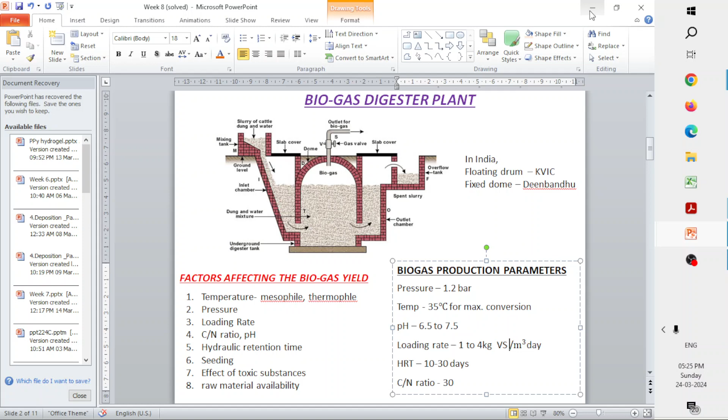The loading rate for your biogas digester system should be maintained between 1 to 4 kg of volatile solids per meter cube per day, as we discussed last week. Let me move to the week 8 slides. We kept the loading rate as 1 to 4 kg of volatile solids per meter cube per day - this is the optimal loading rate. Anything beyond this, or deviation from this scale, will be detrimental for us, and it will decrease the yield of biogas from the system, making the process unsuitable or uneconomical, and a waste of money.

So yeah, let's move on to calculation.

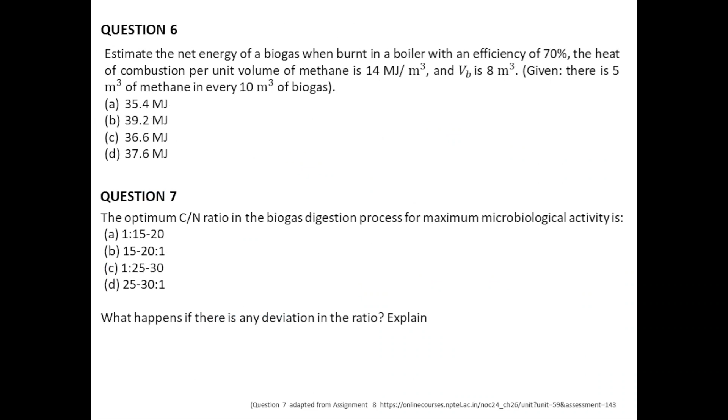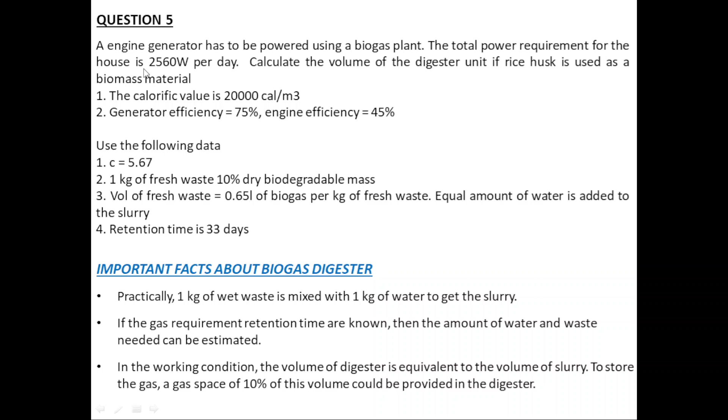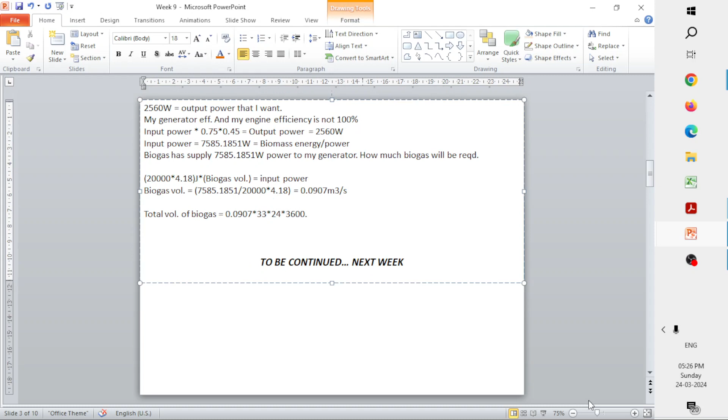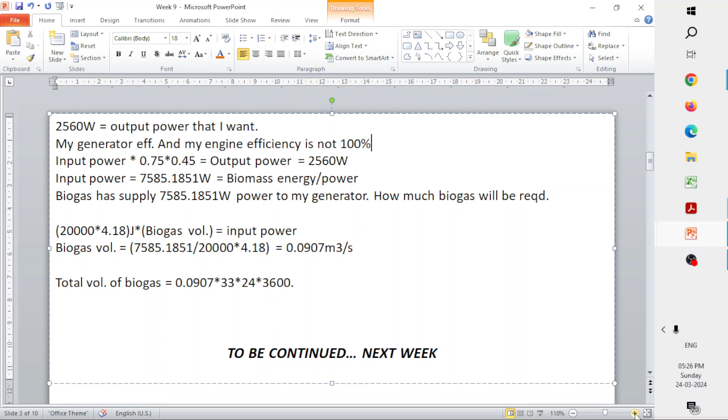In case your generator efficiency and engine efficiency were 100%, there would not have been any issue, because whatever power you supply from the biomass would be used to power my house. But here, unfortunately, the efficiency is not 100% - we have a cap. Generator efficiency is only 75%, and engine efficiency is only 45%. So whatever amount of energy you get from the biogas, if you feed it to the generator and engine, the same amount will not come out to our house, because some energy will be wasted or lost in the engine as well as the generator.

So output power, that is whatever the power that we require to power our requirement, is nothing but the input power that we get from biomass times the efficiency of the two systems, the generator efficiency and the efficiency of your engine.

So the equation is input power into 0.75 into 0.45 is equal to the output power, that is 2560 watts. So what is my input power? That will be 2560 divided by 0.75 times 0.45. So if you calculate, last time when we calculated, the input power was approximately 7585.1851 watts.

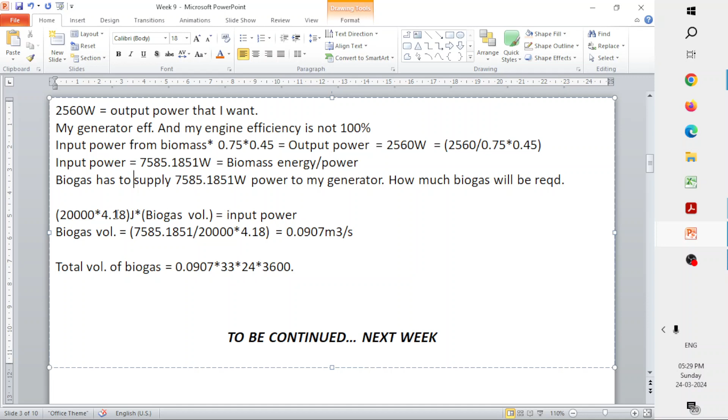So how much amount of the biogas will I require to generate this much amount of power? So that is our next question. We do not know what quantity of the biogas we require. That we are supposed to find out. We know our energy requirement should be 7585.1851 watts. So then we can write this as, we know what is the calorific value of our biomass, that is 20000 calorie per meter cube.

That times your biogas volume will give us the input power. So your biogas volume times your calorific value will give us the input power. So input power that we are supposed to supply is 7585.1851 watts, and we know the calorific value as 20 kilocal or 20,000 calorie per meter cube.

Since it's in calorie and it is in watts, the unit for watt is 1 watt is same as 1 joule per second. I hope everybody is able to recollect this units and dimension. 1 watt is 1 joule per second. So here, since it is in calorie, we are supposed to convert it into joules. So 1 calorie is equal to 4.18 joules. That is the reason this 4.18 factor has been multiplied.

So if you divide 7585.1851 divided by this 20,000 calories times 4.18, how much volume are you going to get? Last time we calculated as 0.0907 meter cube per second. So this is the biogas volume that is going to be generated per second.

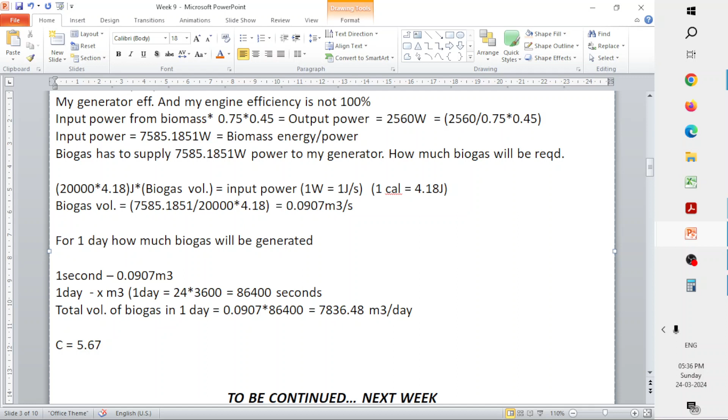So I am supposed to calculate that, because biogas is generated from biomass. Let's calculate, for this much amount of biogas to be generated, how much biomass I am supposed to feed into the system. For that we will use the value C. If you remember the C parameter, it is nothing but how much amount of biogas is generated for 1 kg of dry biomass waste I feed into my system. That is given as 5.67, meaning for every kg of biomass fed into the biogas digester, I get 5.67 meter cube of biogas.

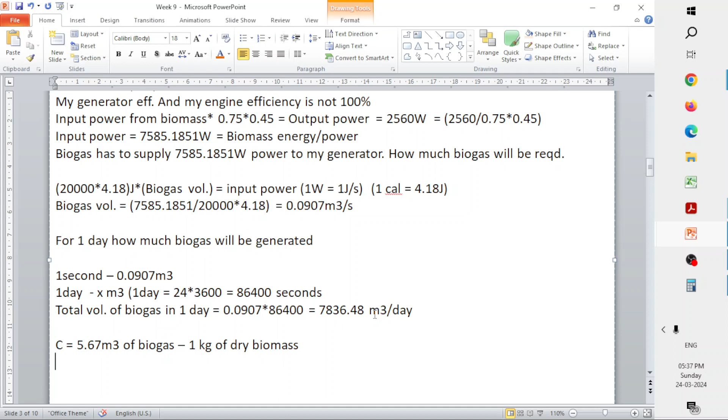So for 1 kg of dry biomass, I am able to get 5.67 meter cube of biogas. I have 7836.48 meter cube of biogas to be generated. So for this much amount of biogas, what will be the amount of biomass I am supposed to feed into the system? Can you calculate and let me know?

The calculation is very simple, you are just supposed to do the division here. So 7836.48 divided by 5.67, that will be 1382.0952 kg of dry matter waste required. So your value of x will be 1382.0952. This much kg of dry biomass waste should be supplied by me per day.

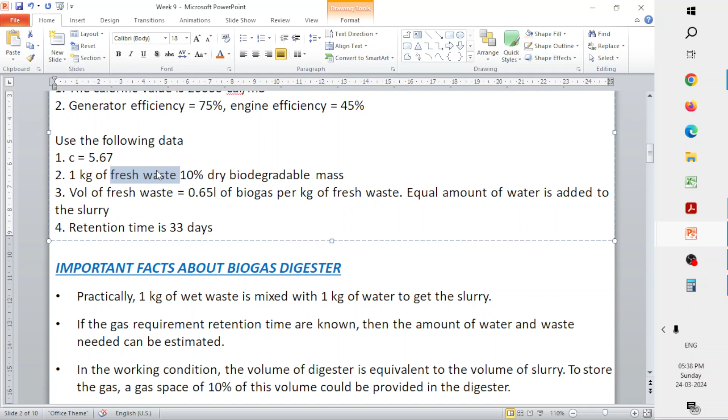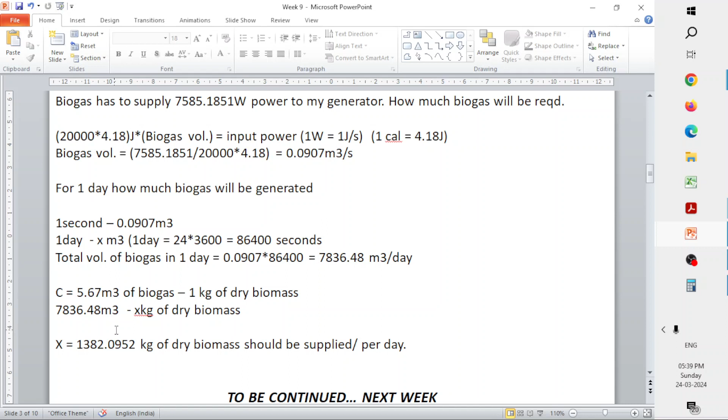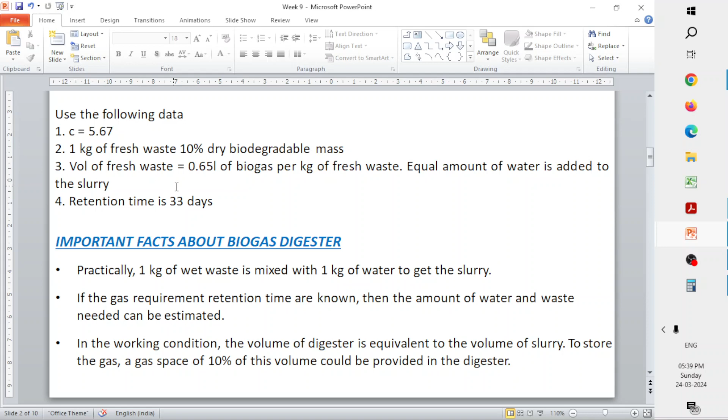So this is the amount of dry biomass waste that I have to supply. But unfortunately, whatever I have with me is fresh waste, not dry waste. So if this is the amount of dry biomass I am supposed to feed into my system, how much wet biomass waste should I supply? That ratio is given: for every kg of fresh waste generated, 10% of it is the dry biodegradable mass. So the amount of fresh waste will be this value divided by 0.1, because 10% of something is going to be 1382.0952.

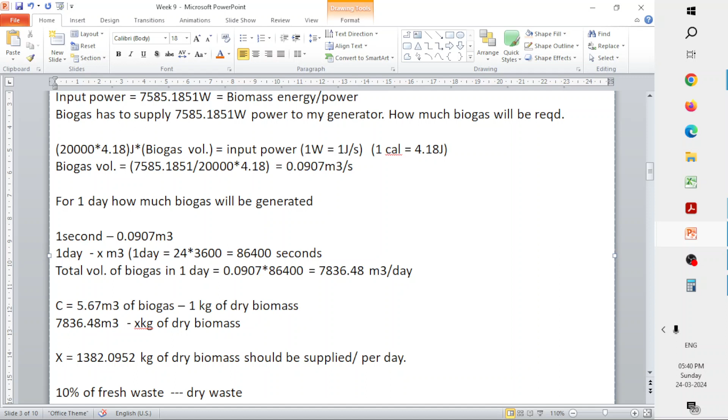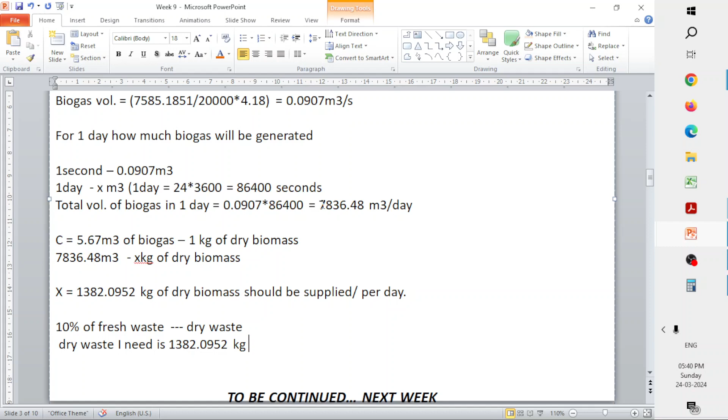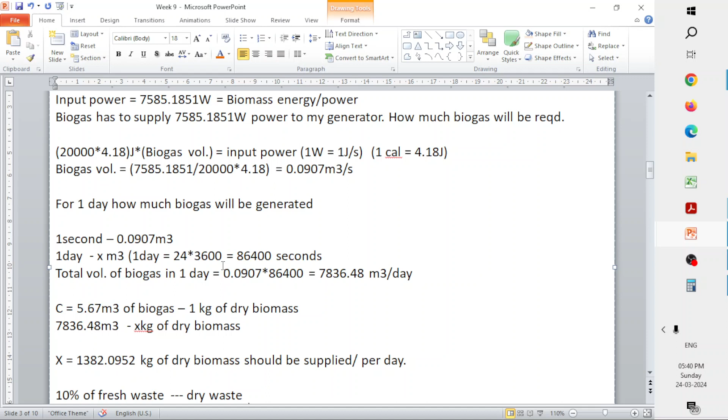10% of fresh waste is nothing but my dry waste. So I know my dry waste now: it is 1382.0952 kg of biomass, so that I will be able to generate a volume of 7836.48 meter cube of biogas, which will generate a power of approximately 7585.1851 watts. So this is the wet waste that I require. Let me write it mathematically also: 10 by 100 times x is 1382.0952, so my x value will be this whole divided by 0.1.

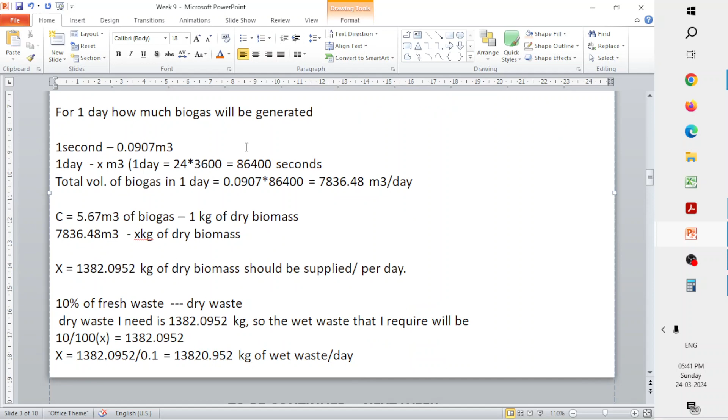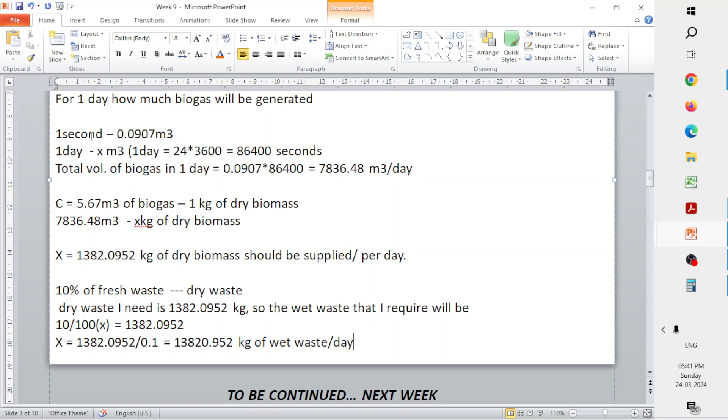That will be 13,820.952 kg of wet waste per day. So this much amount of wet waste is actually required per day for generating 1382.0952 kg of dry biomass, that will generate a biogas volume of 7836.48, to supply a power of 7585 watts, and that will be supplied to my generator to give me a power of 2560 watts. So this will be the amount of wet waste. But what are we supposed to calculate here? We are supposed to calculate the volume of the digester unit.

Now there is another term that is given. So for every kg of my fresh waste, for every 1 kg of my fresh waste, it is able to generate up to 0.65 liters of biogas. So this is for every kg of my fresh waste.

Now I have totally 13,820.952 kg of fresh waste with me. So how much biogas will get generated? Because this will be required for our calculation of the digester unit.

So if you, it's again just cross multiplying, it's just that 1 kg is giving this much, so this much amount of kg will give how much amount of biogas. So 13,820.952 times 0.65 liters. Let's calculate this also. This much amount of liter of biogas will be generated.

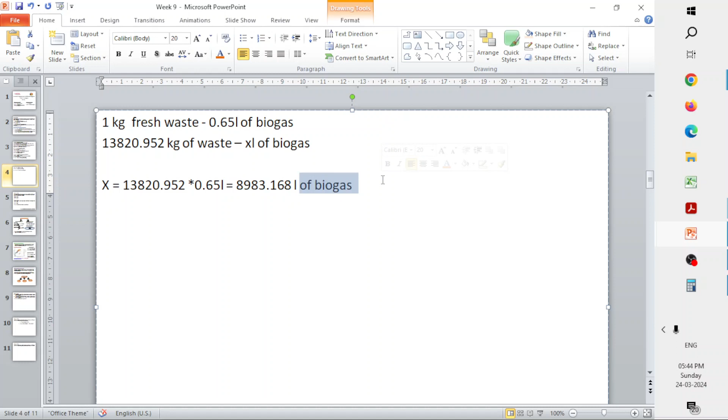Now as we said, we are supposed to add equal volume of water to this system, so that we are able to maintain the rate. If you see here, we are supposed to add equal amount of water to the slurry, so that will be...

Just a minute. I'll just calculate here in my personal. If you got the value, then do let me know.

So we are just supposed to multiply 8983 times 2, 17876 point, if I am not wrong, 336 liters.

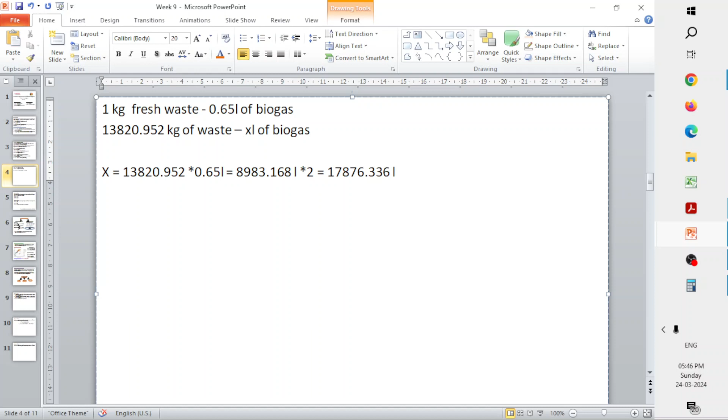Now this is everything we have done is for per day, but our retention time we know is for 33 days, right? So we are supposed to multiply this with 33.

So what will be the answer? So 17876.336 times 33. This much amount of liters will be there, we will get.

So let me just, oh, so these many liters, and then this you can convert as meter cube, like 1 meter cube is 1000 liters. So if you divide by 1000, you will get this much. This is your volume of the digester unit.

So we got to know how to calculate the volume of the digester unit. So first we take our power requirement. This is a kind of back calculation question, or you can also say we have done reverse engineering.

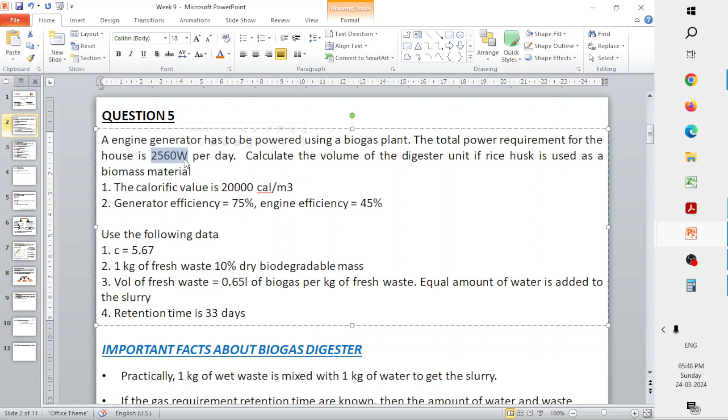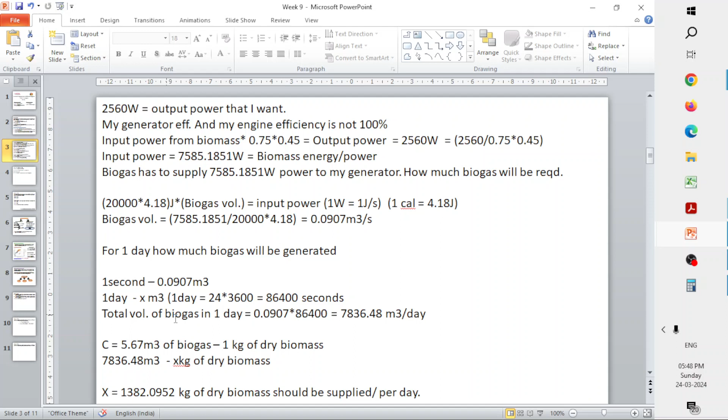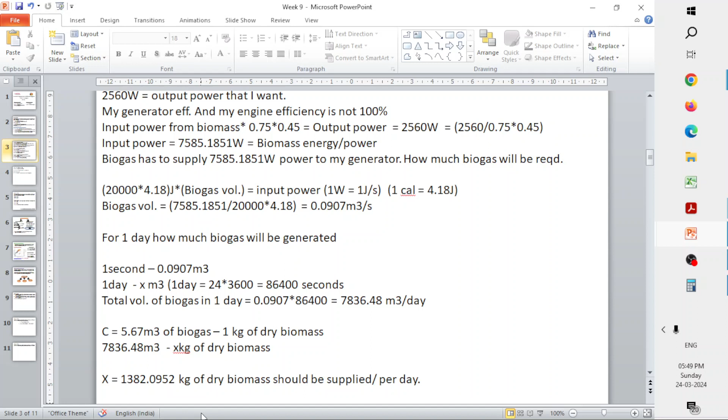From there you can calculate the volume of the biogas that is required to supply this much amount of power. If this much amount of volume of biogas is required, how much amount of biomass am I supposed to feed into my system, the dry biomass waste. If this is the amount of dry biomass waste that I am supposed to feed into my system, then what will be the fresh waste that I am supposed to feed into my system? This much will be the kg of wet waste per day.

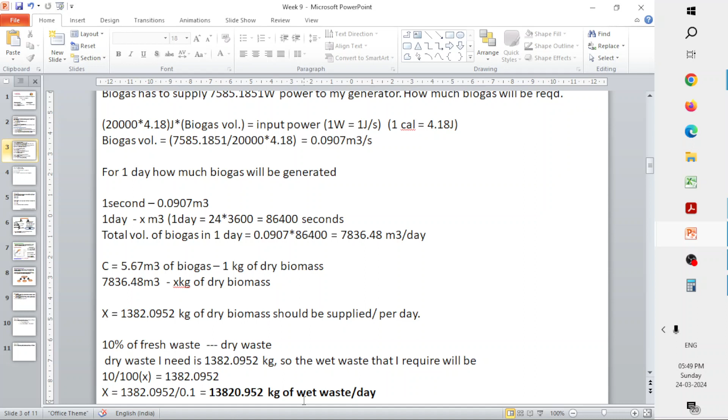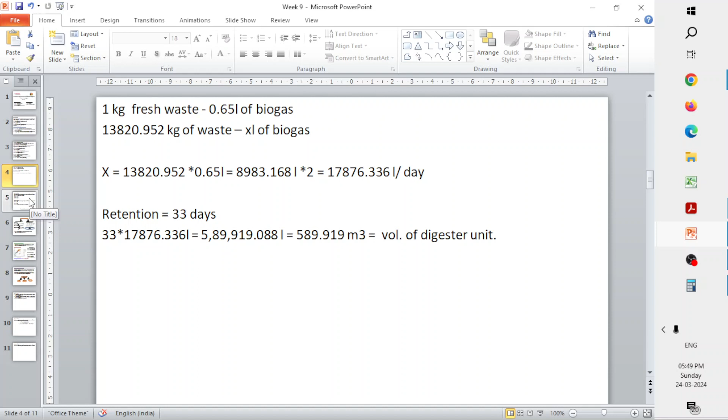And then after that, once you get to know this, then you will be able to calculate the volume of the digester. You just need to multiply that with the retention time. You will be able to calculate what is the volume of your digester unit. That is nothing but the amount of volume of biogas that will be produced by your system.

Now here we move on towards another two questions before we move forward for our discussion today. So I hope you will be able to solve the sixth question. It's a very simple question. You just need to estimate the net energy of a biogas which is burned in a boiler.

It has an efficiency of 70%. The heat of combustion is given as 14. Your volume of biogas is given as 8, and the given data is for every 10 meter cube of biogas, you have 5 meter cube of methane that gets generated. So you are supposed to calculate the net energy that will be generated by this biomass.

So this is very similar to what we did previously in the last live interaction session. So I hope you will be able to solve this. I'll just give you, let's say, 3 or 5 minutes, and then I expect you guys to answer this question. What will be the answer among the 4 options?

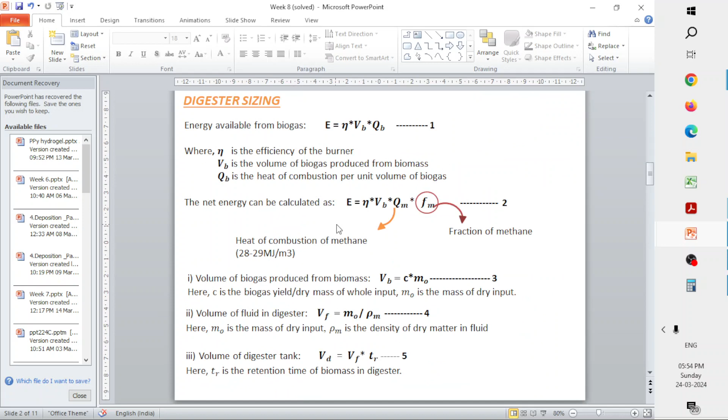This is a straightforward question, let me show the formula here. You will be using equation number 2. I hope you are able to see my slide, let me just zoom in. You'll be using equation number 2 here.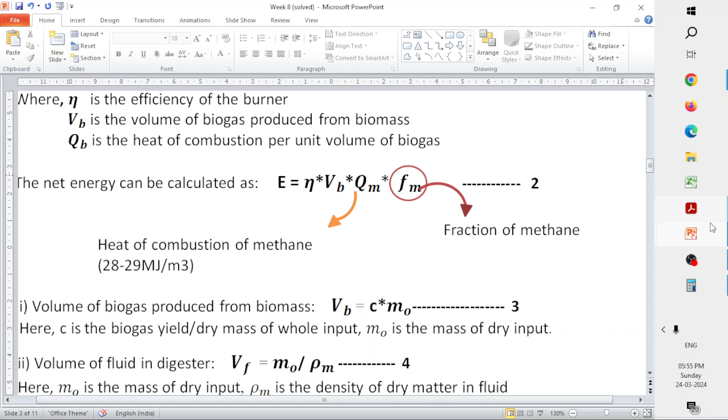Okay, can you tell me what is the value of eta, VB, QM, and FM? I'll type that here also. Net energy, or it should be net power, equals eta times VB times your heat of combustion Qm of methane times your Fm.

So eta is nothing but 70%, or 0.7. And we know our heat of combustion Qm value as 14 megajoules per meter cube. Volume of the biogas VB is also given as 8 meter cube.

Now suppose they are asking us, you are supposed to know what is the value of Fm. Once you know it, just multiply. So what is the value of Fm? What do you actually mean by Fm? This question is very similar to the one you would have solved for your assignment problems also. So what is Fm, what is the meaning of Fm? Then we will be able to calculate from this question.

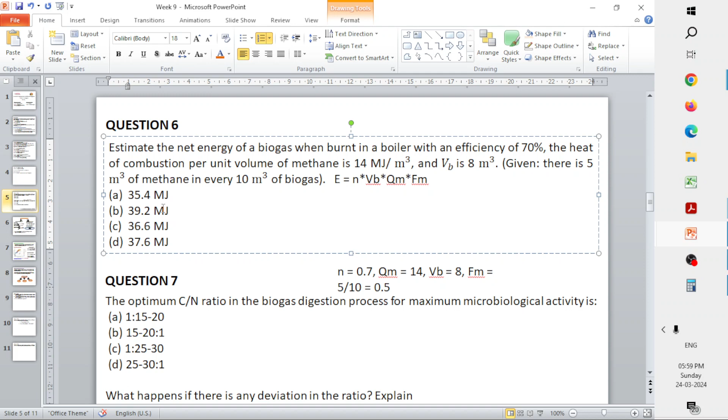So it's just now multiplication, please let me know the answer. You just need to multiply, and the units here are also the same, megajoules. So if you calculate, 0.7 will be your burner efficiency, QM will be 14, VB will be 8, and your FM will be 0.5. So 39.2 megajoules. This is the answer.

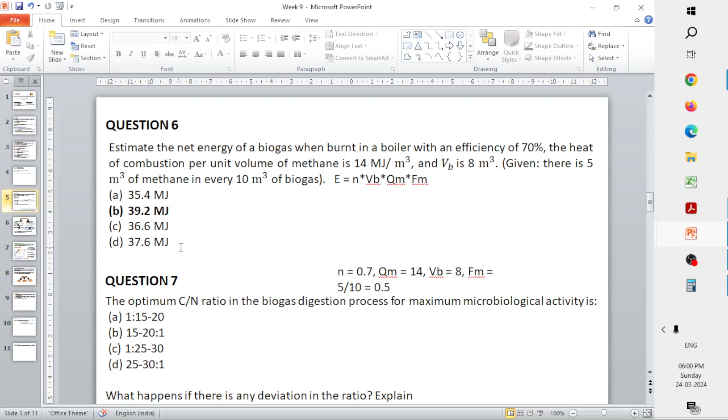This is a very similar question to what you would have solved for your week 8 assignment question. We solved this previously also in our week 8 live interaction session, if you remember. Compared to that one, this one was a very straightforward question. So next we move on to this, also one of your questions in the assignment.

What should be the optimum CN ratio for your biogas digestion process? If you remember, in last week's session as well as today in the introduction of the live interaction session, we discussed the different factors that affect your biogas yield from the biodigester system. One of the factors affecting biogas yield is your carbon to nitrogen ratio. So what should be its optimum value so that you can get maximum microbiological activity?

The question also we have put forth here is that if there is any deviation in this ratio - let's say I don't maintain it and maintain my own particular ratio - then what will be the implications or consequences of that? We are supposed to explain that as well. So what is the answer?

This is a straightforward question. Let me give you the answer first, because that is just the optimum ratio value you are supposed to know. But what we mainly want to know is why this is the optimum ratio and what happens if I deviate from this. So the optimum carbon to nitrogen ratio is 25 to 30 parts of carbon for every part of nitrogen. Now the question is, why am I supposed to maintain this, and what will happen if there is any deviation from this ratio?

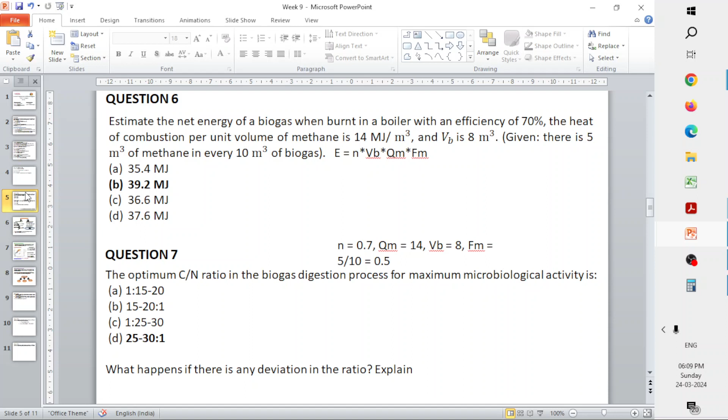In case you have any doubts, please let me know now, because we are going to move forward to our week 9 content, like the biomass conversion into different types of products. So if you have any doubt, let me know now.

In week 9 we will be again focusing on biomass conversion. Here we will be discussing every single process in detail of pyrolysis, gasification, combustion, and then we will be discussing about the ethanol fermentation.

We won't be discussing the anaerobic digestion process because we discussed this concept rigorously in depth in the last week session and the week before that. Here we will be discussing only the thermal conversion processes: pyrolysis, gasification, combustion, and one more process called torrefaction. In chemical conversion, we will be moving to ethanol fermentation.

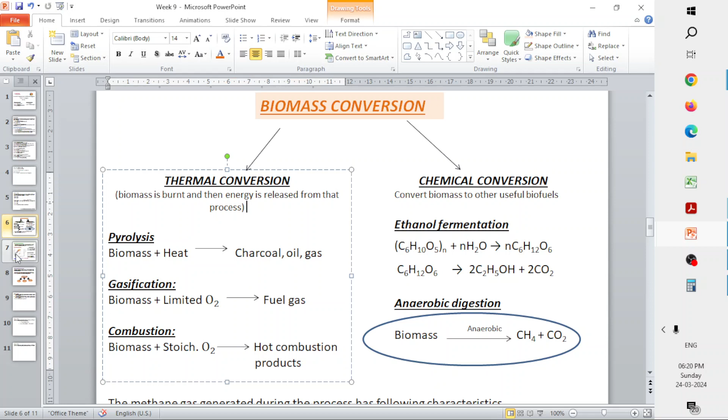Pyrolysis: no air or oxygen. Gasification: limited supply of oxygen or air. Combustion: stoichiometric or excess quantity of air or oxygen. So now we move to combustion. Let me just put this in PowerPoint mode—combustion of biomass.

So what is the meaning of combustion?

As we said previously, we will be using stoichiometric quantity or excess quantity of air for the complete combustion of the biomass. I hope my slide is visible to everybody, because usually when I do this, the slide may not be visible to you guys.

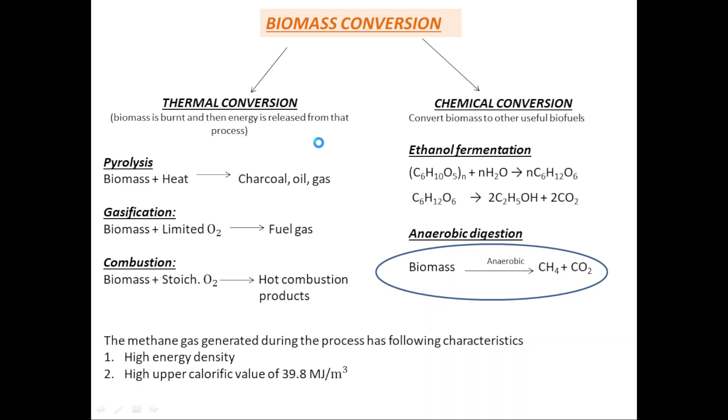So what is actually the meaning of combustion of the biomass? As we said, it is either burning of your biomass sample in stoichiometric quantity or excess quantity of air. So what is the meaning? If you see this word, the stoichiometric quantity of air, what do they mean when they say a stoichiometric quantity of air?

For a combustion or burning process, there are totally three things actually required. If you are going to burn a material, combust a material, you are going to require three things. One is your air, because without oxygen supply you cannot ignite the material, you cannot burn it. Then you require fuel, and the third one is temperature. Without these three things, any material will not burn. So enough supply of oxygen, enough supply of fuel, and enough temperature should be there for burning a particular material.

So the stoichiometric quantity of air, the alternate term for it, is theoretical quantity of air. The exact meaning of the stoichiometric quantity of air is nothing but the theoretical amount of oxygen that is required to complete the combustion process.

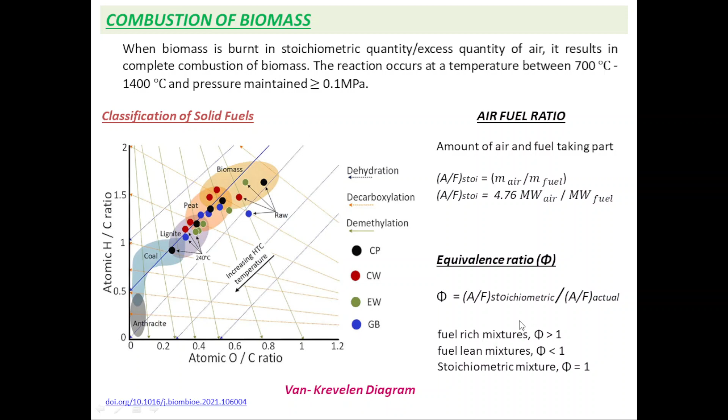Because this equivalence ratio can actually be written as F by A of actual divided by F by A of stoichiometric. This can alternatively be written by inverting the A and F, the amount of air and the amount of fuel. If you write it the other way around, this will be the equivalence ratio formula.

So from this you can say that if phi is greater than 1, then F by A will be greater than 1, which means the amount of fuel you put into your system will be greater than the amount of air present. In case of fuel lean mixtures - the word 'lean' means it is less in amount - so in that case the amount of fuel present compared to air will be less.

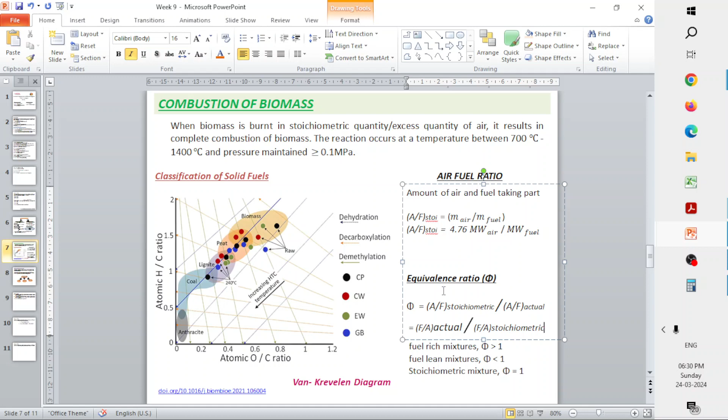Now we move on to the process called torrefaction of biomass. But before this we have to discuss the classification of solid fuels. This is also called the Van Krevelen diagram. It is a plot between your hydrogen to carbon ratio to that of your oxygen to carbon ratio.

It usually represents the elemental composition changes that happen when it undergoes dehydration, decarboxylation and demethylation process. The fuels that have high oxygen to carbon ratio, when you go beyond 0.8 on the right hand side of the axis, the heating value - I hope you recollect what is meant by heating value - that value will decrease.

One more thing to make sure here is, the higher the oxygen and hydrogen content - since hydrogen and oxygen can react and form water - the high volatile liquid yield will be more. So when you select a particular material for combustion or gasification, the oxygen to carbon ratio should be low so the heating value will be more, and the hydrogen and oxygen ratio should also be less, so that volatile liquids cannot be formed.

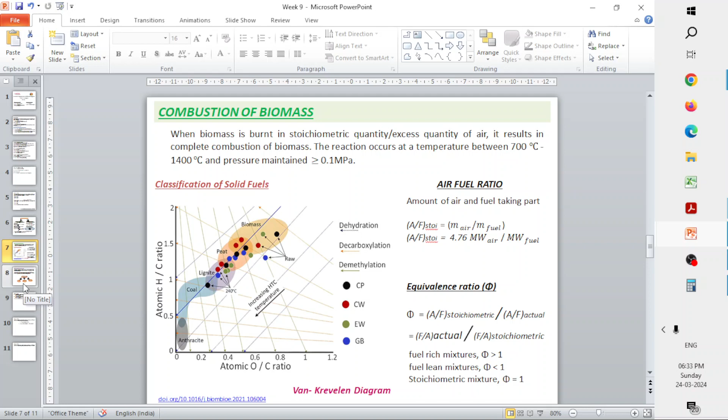So these two things you should keep in mind while selecting your biomass for a particular process. Next we move on to the torrefaction of biomass. If you have doubts related to the combustion process, you're welcome to ask me before we move forward to this thermal conversion process called torrefaction of biomass.

This process is again a thermal conversion process, just like pyrolysis, gasification and combustion, and it also occurs in an inert or low oxygen environment, similar to pyrolysis and gasification. But it's different from carbonization and pyrolysis even though their processing conditions are similar. The amount of carbon rich solid product you get through torrefaction will be higher compared to carbonization and pyrolysis, and other advantages and disadvantages are listed in the video lectures.

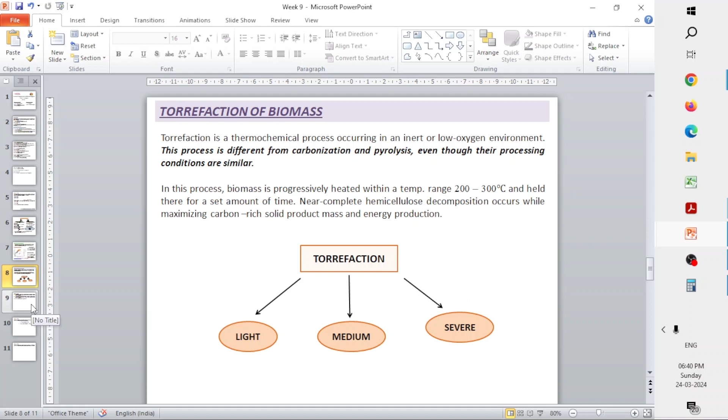So in case of a severe torrefaction process, entire degradation happens. In medium torrefaction, the hemicellulose and cellulose degradation happens. In light torrefaction, only hemicellulose degradation happens. So this is the different types of torrefaction process that we have.

Now let's start solving some problems related to the combustion process, and how much amount of ethanol you will get from the ethanol fermentation process.

So here you have a question. It states that the theoretical ethanol yield that you have from a C6 sugar, so 6 carbons are present in that sugar form, is 700 kg per ton. They are asking you to calculate the approximate concentration of sugar present in the biomass if the theoretical ethanol yield constant is 0.51. So this is a very simple question. I hope you will be able to answer this question.

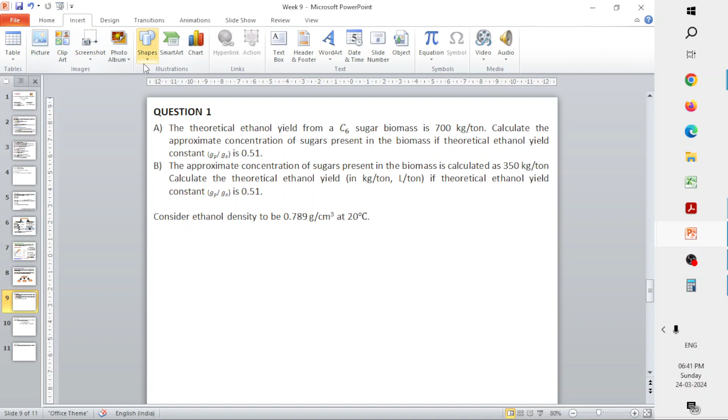Let's just solve this question. So your theoretical ethanol yield, what is it? It is nothing but your concentration of sugar in that biomass times your yield constant.

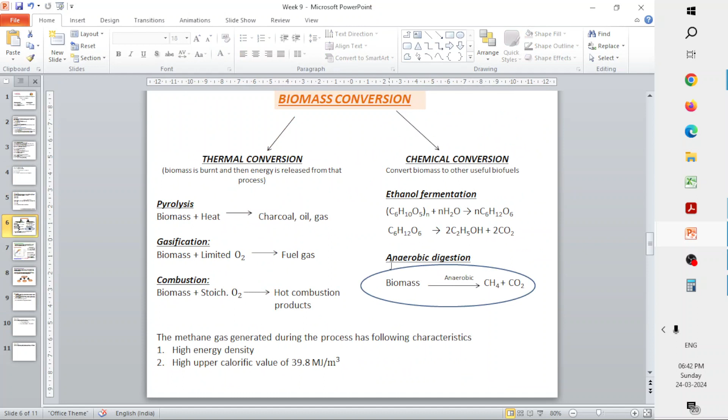So your entire sugar will not be able to get converted to ethanol, right? There will be a certain fraction. If you see in case of this chemical conversion also, some amount of the sugar, that is your glucose sugar, will get converted to carbon dioxide. So it's not that all the sugar present in your biomass will be converted to ethanol. There will be a certain percentage of that sugar content which will be released out as carbon dioxide gas. That is the reason we are supposed to calculate the theoretical ethanol yield.

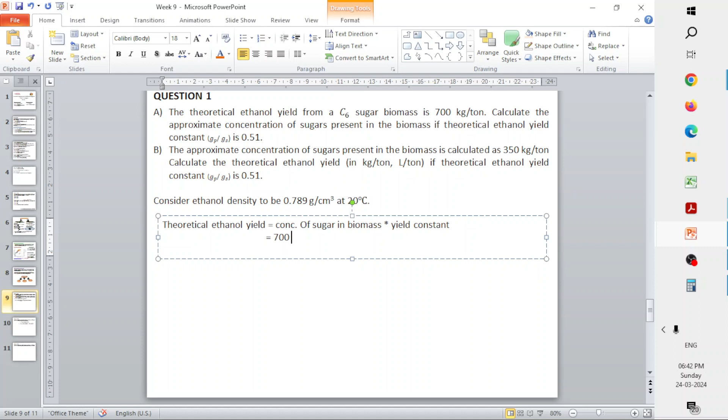So this is very simple here. You have the concentration of sugar in the biomass, that will be 700 kg per ton, and your yield constant value is given, that is 0.51. So that's all simple. Your theoretical ethanol yield will be nothing but 700 times 0.51, it will be approximately 357.

And since the yield constant is dimensionless, the result is in kg per ton. So what it actually means is, for every 1 ton of biomass, you have 700 kg of sugar, and when you process that sugar, you get 357 kg of ethanol. Ton is nothing but 1000 kgs. So for every 1000 kg of biomass that you subject to the fermentation process, the sugar present in the biomass will be 700 kgs, and for every 700 kg of your sugar that undergoes the fermentation process, you will be able to obtain 357 kg of ethanol.

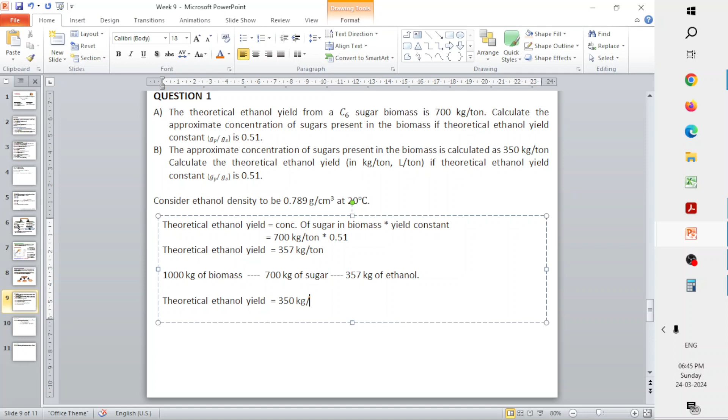So the theoretical ethanol yield: concentration of your sugar in biomass is 350 kg per ton, and your yield constant value is 0.51. This will be approximately, it's just half of that, so 178.5 kg per ton of theoretical ethanol yield. So this is the theoretical ethanol yield you will get, 178.5 kg of ethanol for 1 ton of biomass. Now you are supposed to calculate it in liter per ton.

So that is nothing but, if you divide this by density, you will be able to get the theoretical ethanol yield in liter per ton units.

So that is nothing but 178.5 kg per...

Your density is given as 0.789 gram per centimeter cube. So here it is in kgs and here it is in grams, so you are supposed to convert this into kg per liter, right? So 1 centimeter cube is nothing but, I hope you will be knowing this, 1 ml, or you can recollect this also. 1 centimeter cube is nothing but 1 ml.

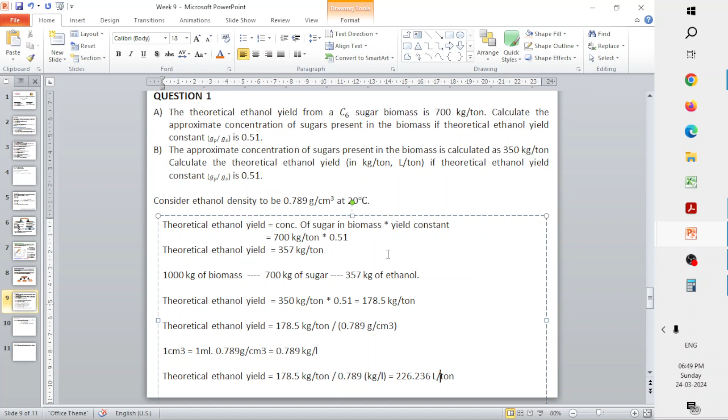Here you know the concentration of sugar that is present in your biomass, and since all your sugar cannot be processed to get ethanol, because some amount of it will be generated out as carbon dioxide and other gases. So you multiply that with your yield constant, and then you will be able to get your theoretical ethanol yield, both in terms of kg per ton and liter per ton.

Now we move towards the next question. So here let me give you some time to see the question or read the question.

Now this is going to be subjected to combustion process. So C3H8 is going to be burnt in the presence of air. Air usually consists of nitrogen as the major constituent. Apart from that, you have oxygen, carbon dioxide, moisture, and other different types of gases present. But the major two gases present in your air are nitrogen and oxygen. Since the rest part is very little, the fraction is very small, so we usually neglect that. So if air is going to combust my material, I will take up only with the oxygen and nitrogen.

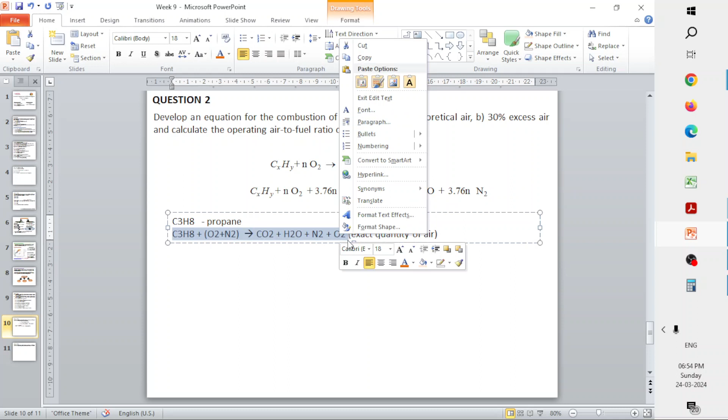So if you have excess of air, then after combustion, whatever amount of excess is present, or the amount that does not get used up for the combustion process, will come out with the products, right? So you are supposed to add that also if you are supplying air in excess. So let me just write that. This will be in exact quantity of air, and this will be in excess.

And if you see, the reason why we add 3.76 is because for every 1 mole of oxygen that you take in the air, you will have 3.76 of nitrogen. Because the air is composed of 79% nitrogen gas and 21% oxygen gas, right? So since for our purpose here we are taking the contribution from the rest of the gases as negligible, we take it as 79% nitrogen and 21% oxygen. So if you divide the 79 by 21, then you will get 3.76. Let me show that.

3.76. So what it means is, for one mole of O2 or oxygen gas, you will be having 3.76 moles of nitrogen gas. So that is what is the meaning.

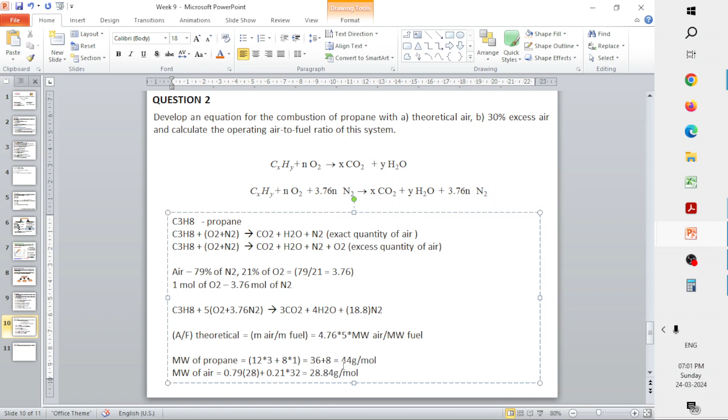You can also try calculating here. 6.72, 22.12, 28.84 grams per mole. So here you need to calculate the average molecular weight by considering the composition of both nitrogen as well as oxygen.

So after this, it's just substituting. So you have 4.76 times 5, and you have your molecular weight of air as 28.84, and your molecular weight of fuel is 44. So its value will be 4.76 times 5 times 28.84, the whole divided by 44. So it will be 15.5998 kg of air per kg of fuel.

So if you see, the amount of air that is going to be present compared to the amount of fuel is more. So for every 1 kg of fuel, you have 15.5 kg of air. So this means this is a fuel lean mixture.

And then so now we are done with the exact quantity of air. We are supposed to calculate what happens if we have 30% of excess air. So when I say 30 percentage of excess air, what it actually means is I am supplying stoichiometric quantity of air. On top of that, I am going to add 30 percentage more. So let us do that.

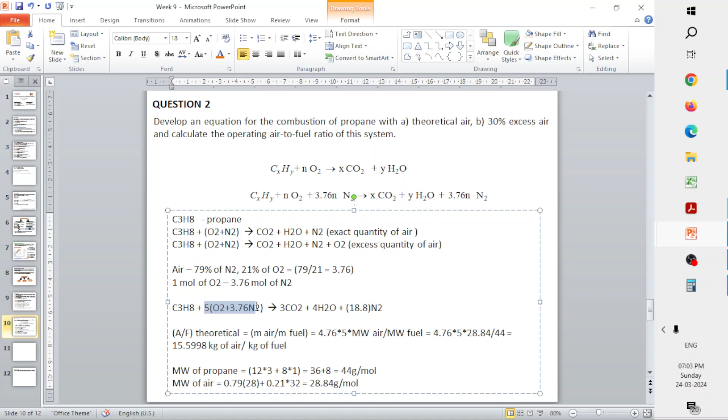So what is the theoretical quantity? It will be this 5 times O2 plus 3.76 times of the nitrogen gas. This is nothing but my theoretical air.

To this I am going to add 30 percentage. So 30 percentage of this will be added on top of the theoretical air.

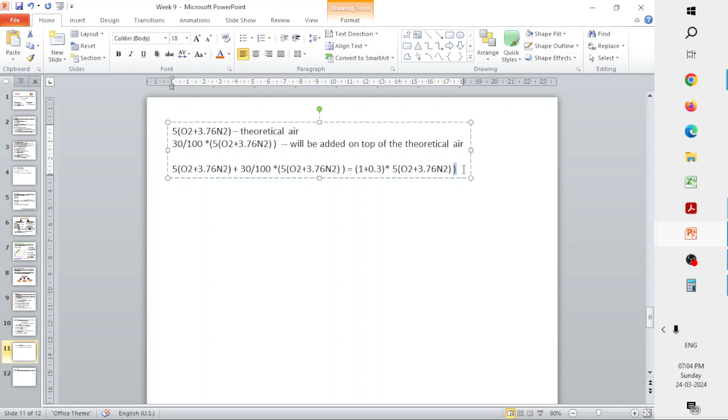So which will be nothing but these two together, right? Because it's in excess, you are adding it in excess. It's not that only 30 percentage you are supplying, but you are adding 30 percentage in excess. So this means 1 plus 30 by 100 is 0.3 times this one, i.e., 1.3 times of the theoretical air requirement.

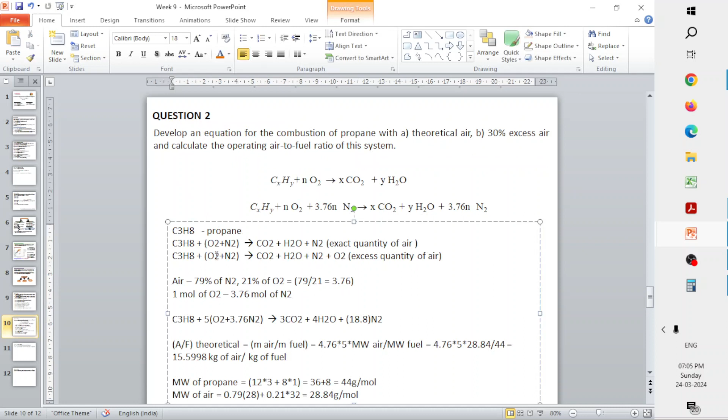So now you know how much air you have to supply for the combustion of your propane. Let's take up this equation, and as I said, nitrogen is inert, so it will come out on the product side, and the excess air that you supply, which is not getting involved in the combustion process, will also come out of your system. So it will be 1.3 times of 5.

So now you know what will be your air requirement. You just need to balance the equation, atom by atom. For carbon, here it is 3, and only carbon atom is present in carbon dioxide, so 3. Here 8 atoms of hydrogen, so 4. And the total oxygen here will be 1.3 times 5, so that will be 6.5 on the reactant side.

And 6.5 times 2, so 13 on the reactant side and 10 on the product side, so it will be 1.5 here. Then the rest will just be balancing the nitrogen, that is 1.3 times 5 times 3.76, that will be 16.92. Just it's 1.3 times 5 times 3.76, 24.4.

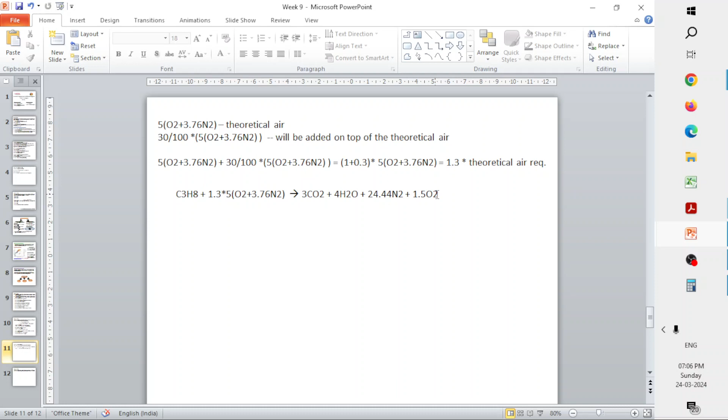So this will be our balanced equation. Now for this we are supposed to calculate the A by F ratio. That is again nothing but 4.76 times N, where N is the total moles of the air that is actually involved in the combustion process.

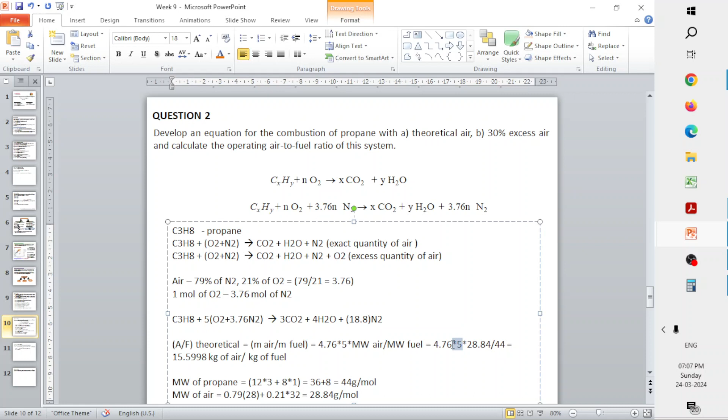Here, since 5 moles of air is participating in the combustion process, we multiplied it by 5. Here we are supposed to multiply that with 6.5, because 1.3 times 5, right? This into molecular weight of air, 28.84, divided by molecular weight of fuel, propane, 44.

So if you multiply, then you will be getting 4.76 times 28.84 times 6.5, the whole divided by 44, which is 20.279 kg of air per kg of fuel.

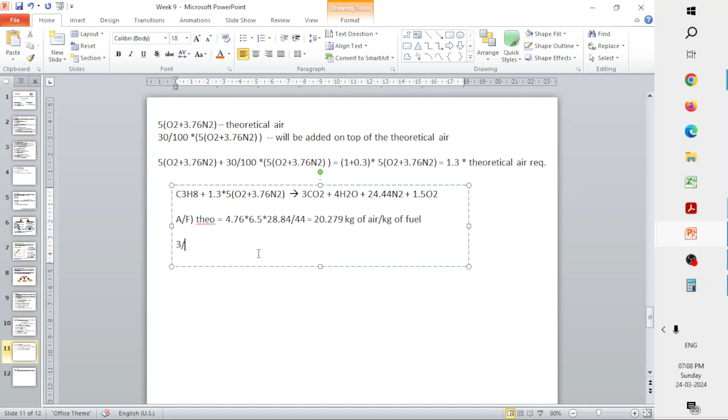And if we are asked to calculate the volume of carbon dioxide or any other element, it is nothing but the moles of that particular element to the total moles on the product side. Suppose in the next question they ask the volume of CO2 produced, then 3 moles of carbon dioxide is produced, so it's 3 by the total number of moles in the product side.

So it will be 3 plus 4 plus 24.44 plus 1.5, which is 32.94. So 3 divided by 32.94 will be 0.091. This will be the fraction of carbon dioxide produced in the combustion process.